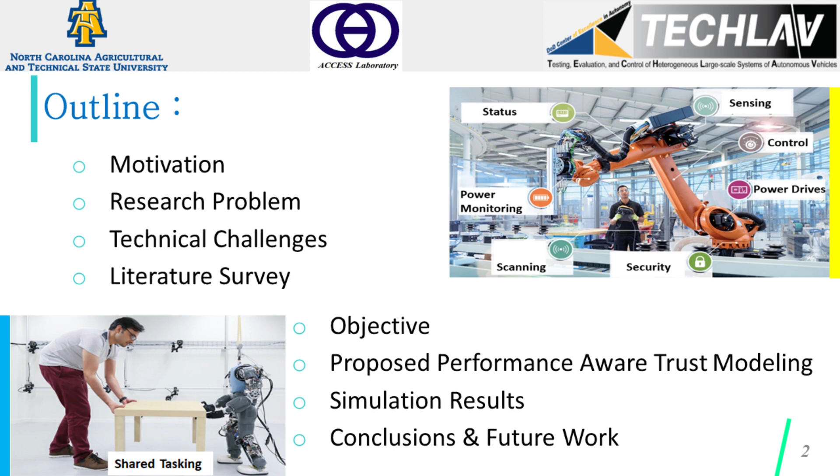This research is motivated by various human-robot collaboration applications that include warehouse management and packaging, cooperative tasking, improved safety, security, and accuracy in operations, and shared control strategy for collaboration with the robot to perform surgical tasks, and so on.

A trustful autonomy is vital for allowing human operators to smoothly control the system, comprehend the system states, and efficiently supervise the robot's activities to guide the robot to adapt to the working environment so that the human operator's trust in robots' capabilities for decision-making and handling the tasks can be increased over time.

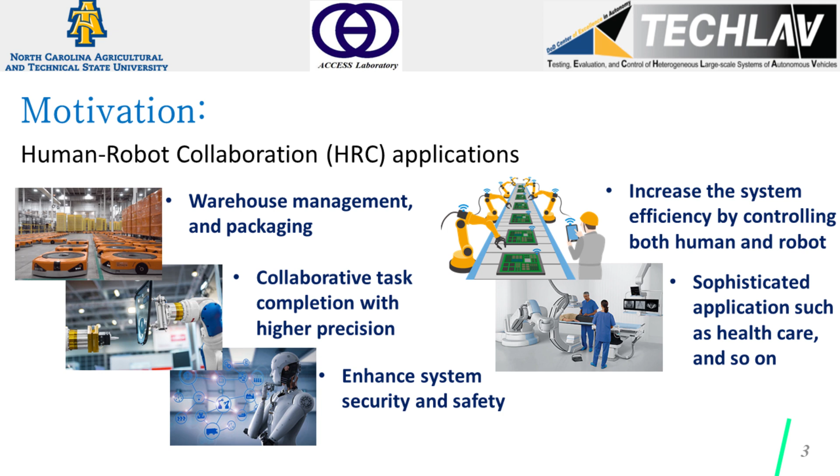Before discussing the technical challenges of this paper, let's briefly review the factors that are involved in the human-robot collaboration settings. In this setting, human operators' trust in the robot's operation can be impacted by several involved factors, that include human operators' performance and the robot performance.

So, the research problem is to develop a time-driven performance-aware mathematical model for trust in the robot within a human-robot collaboration setting and to describe the relationship between the trust and the contributing factors including human cognitive performance, human physical performance, and robot performance. Further, we are interested in understanding the relationship among trust, human cognitive and physical performances, and the robot's performance.

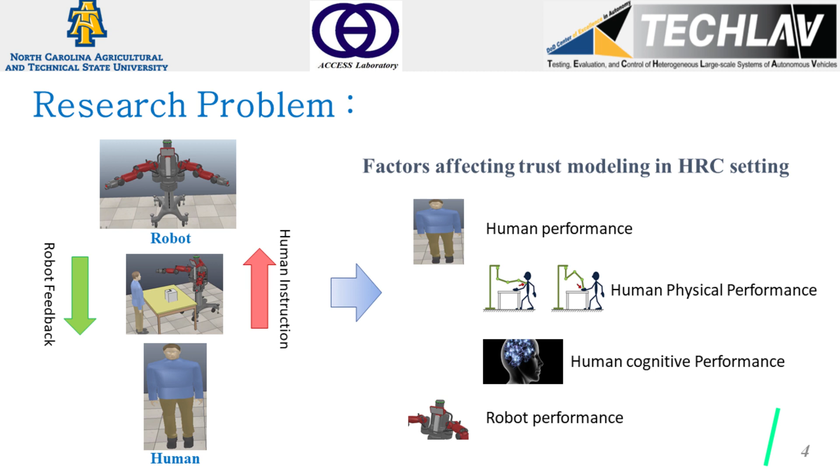One of the major challenges for mathematically modeling the trust in robot operation is its quantification in terms of the changes in the human cognitive workload and/or the human physical workload, the complexity of the shared tasks and the performance of the robot, over time.

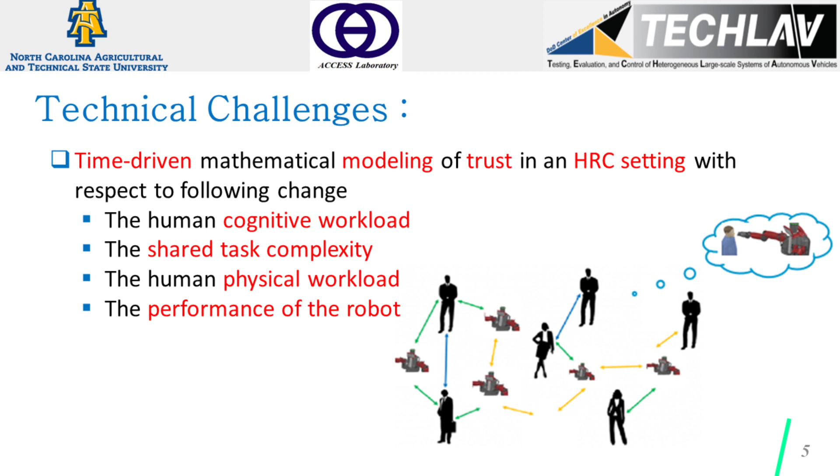In the literature, several techniques have been followed to model human operators' trust in the robot within a human-robot collaboration setting in terms of both human physical and cognitive performances, and the robot performance. In references 1 to 3, mathematical representation of a static trust model in multi-autonomy range has been proposed without any considerations of the collaborative performance.

The researchers in reference 4 have proposed trust modeling that involved only the considerations of the physical activities between the human and the robot, but no cognitive activities have been considered. In reference 5, a series of experiments with human in the loop have been performed to estimate the evolution of a computational trust model.

In contrast to the static trust models, our proposed model can capture the trust in a dynamic way. In addition, the proposed model considers the changes in both the human operator's physical and cognitive performances for modeling trust in relation to the associated task complexity. This makes our approach more realistic than the models that consider only the physical performance of the human operator.

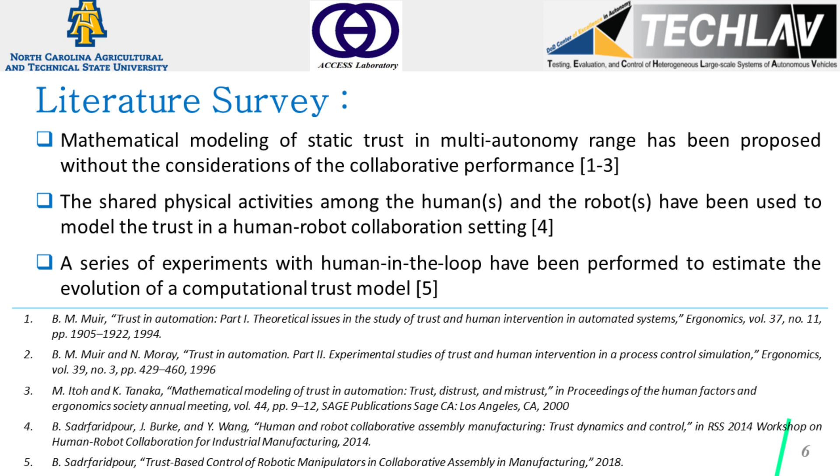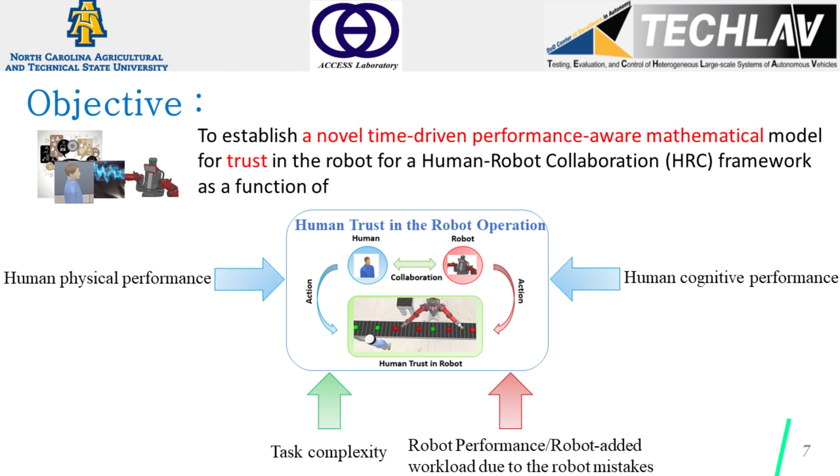Recognizing the limitations of the existing research, we propose a novel time-driven performance-aware mathematical model for trust in the robot for a human-robot collaboration framework. The proposed model considers human cognitive and physical performances. Further, the developed model takes into account the effect of the task complexity of the assigned task on human operators' trust in the robot operation.

Here, we describe the human-robot collaboration setting that is used throughout our discussion and is symbolically shown on the right side of the slide, in which a human and a robot are collaborating to perform a shared task. The robot can be utilized to perform repeated routine work, while human intelligence can handle more complex tasks such as decision-making. The robot performs the task based on instructions received from the human in the form of cognitive signals.

The human operator has been deliberately positioned after the robot, and if the robot fails even after receiving sufficient human operator's instructions, the human operator then physically removes the target object from the source conveyor. The interaction between human and robot increases the human utilization factor and the physical and cognitive workloads.

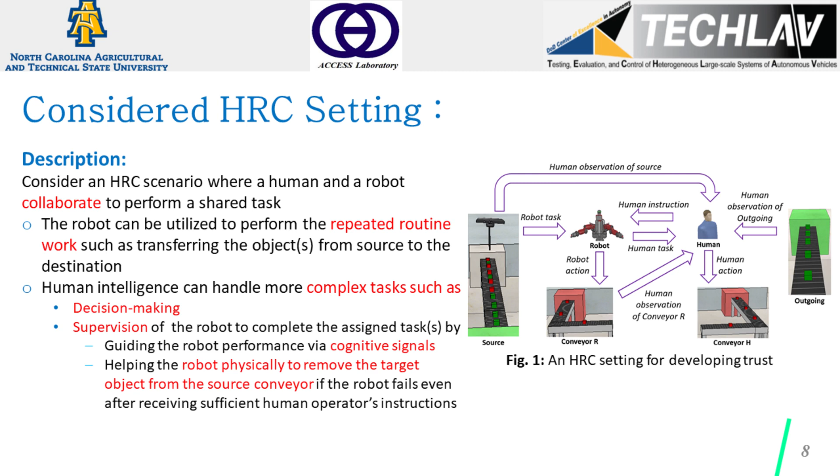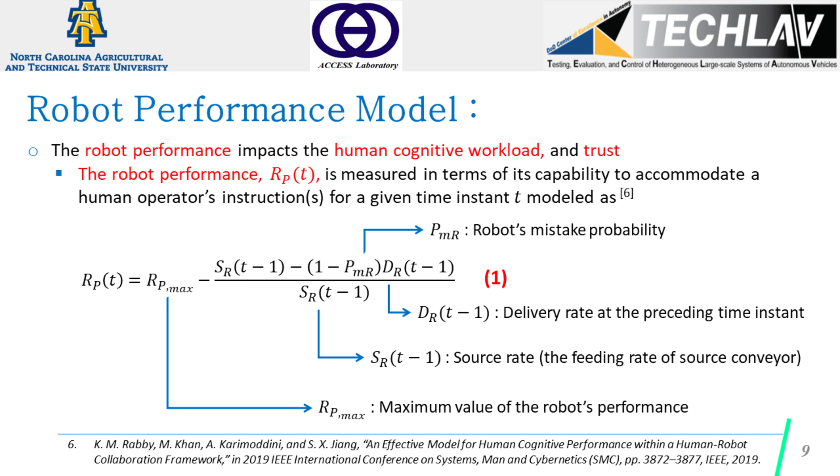As mentioned earlier, the robot performance has a significant impact on the human workload, and hence trust of the human operator. The robot performance RP for a given time instant t depends on its success in the completion of tasks, which can be modeled as given in equation 1, where RP max is the maximum value of the robot performance, PMR is the robot's mistake probability, SR is the source rate or the feeding rate of source conveyor, and DR is the delivery rate or percentage of items being handled by the robot and put on the correct conveyor at the preceding time instant.

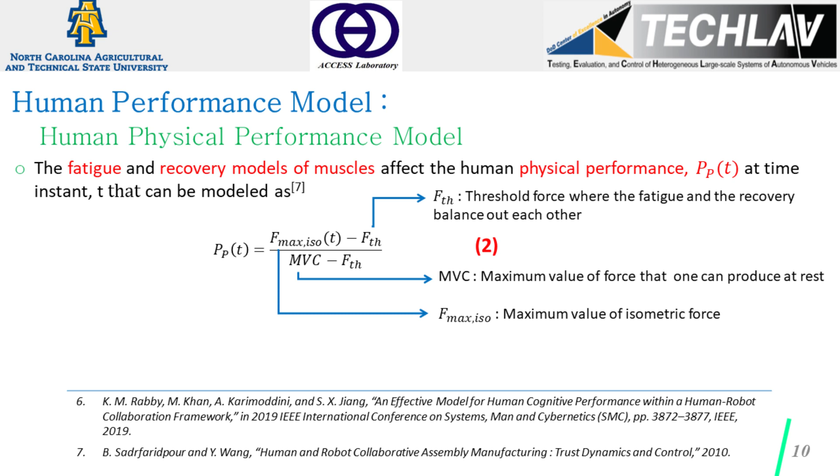Fmax ISO stands for the maximum value of isometric force and MVC for the maximum value of isometric force that one can produce at rest or the initial state or zero level of fatigue. The details about this equation can be found in one of our previously published works described in reference 6.

Incorporating all these factors, human cognitive performance CP can be modeled as equation 3, where CP max is the maximum cognitive performance, CW is the human cognitive workload, HW is the human physical workload, HR is the additional workload that is added due to mistakes of the robot, and alpha, beta and gamma are positive real numbers with alpha plus beta plus gamma equals 1.

We would like to highlight the fact that according to this equation, the human's cognitive performance is at a maximum when it is subjected to a minimum workload with no fatigue, and robot performance is maximum.

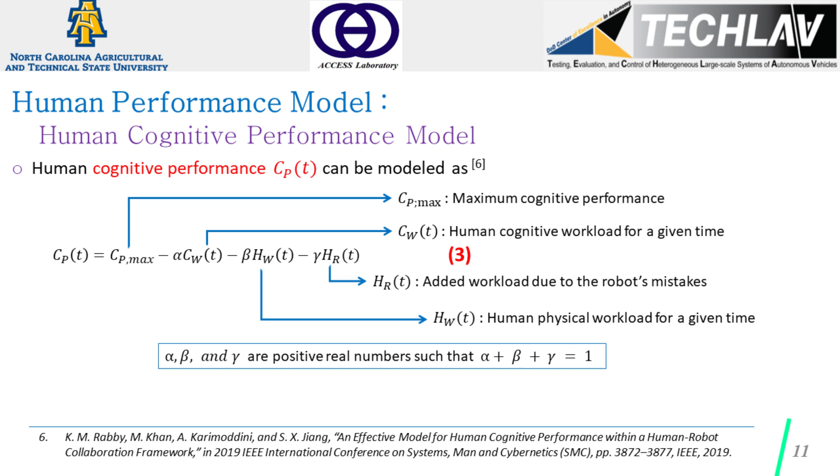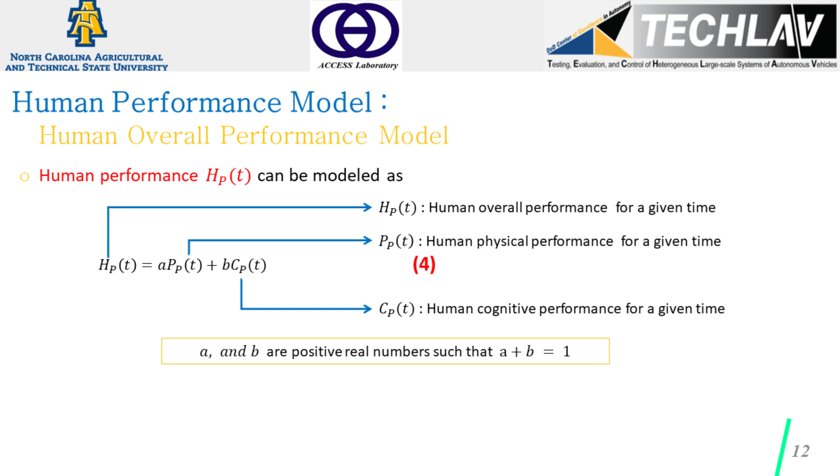Considering the human operator's physical and cognitive performances, the overall performance is calculated using equation 4, where A and B are the positive real numbers that represent the human operator's physical and cognitive performance coefficients respectively, such that A plus B equals 1. These two parameters vary in the range between 0 and 1 depending upon the nature of the work being performed by the human operator.

Trust depends upon the human operator's perception of the workspace, tasks, and the collaboration. Trust build-up process requires the human operator's confidence in the robot performance to meet the expectations to be at least equal to his or her performance. In literature, trust is commonly captured based upon three aspects such as predictability, dependability, and faith.

These parameters can be defined as distinct regions for trust build-up process represented over a normalized range as unpredictability, in which the robot performance is much lower than that of the human operator, and hence, the human operator has no trust in the robot. Predictability is where the initial trust of the human operator towards the robot is at a fixed level. Dependability is where the human operator's trust in the robot increases with the increase of the robot performance, and faith is where the human operator's trust in the robot is at the maximum.

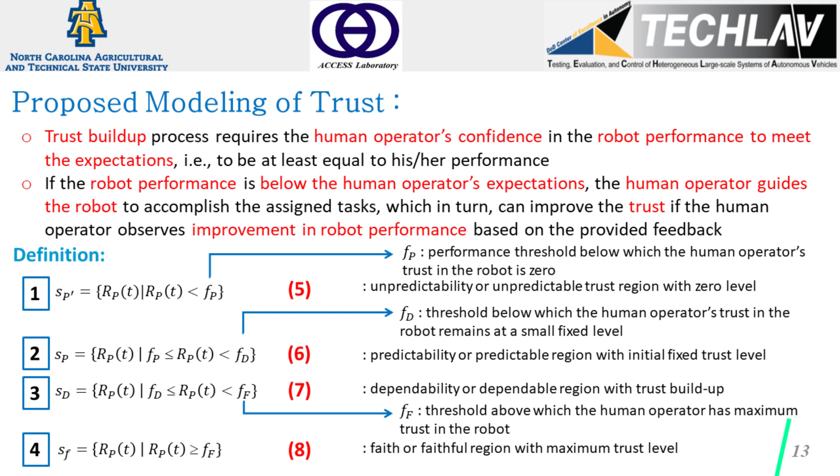With these definitions of unpredictability, predictability, dependability, and faith that is discussed in the previous slide, trust is defined in equation 9. Figure 2 shows the trust as a function of Rp at time t that is less than threshold Fp. Here, threshold Fp is the function of human performance at time t, and sigma is a small number used for representing robot performance in the unpredictable region. As such, the trust in the robot is modeled as 0.

When the robot's performance is more than or equal to threshold Fp but less than threshold Fd, that is the function of human performance at time t, and ρ that is a small number, in the predictable region, the trust in the robot remains at the epsilon level, which is a small constant value. Only after the robot performance is greater than or equal to threshold Fd, the robot's performance enters the dependable region, and the trust build-up process starts.

In this situation, we consider the trust as a function of the relative performance of the robot and the human operator. Once the robot performance Rp is greater than or equal to threshold Ff, then the robot reaches the faithful region, and the trust will be at the maximum. Here, ΔP equals Rp at time t minus threshold Fd. Moreover, C and epsilon are variables that depend upon the human operator's nature.

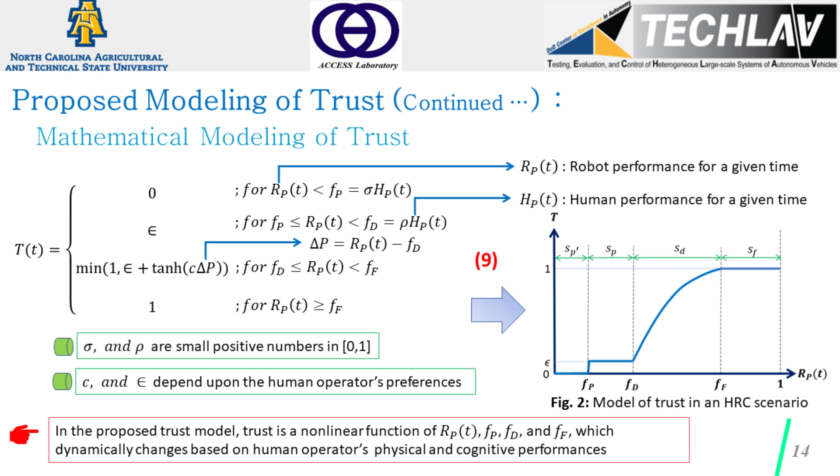To validate the proposed model of human operator trust in the robot operation, we consider a manufacturing workspace scenario in which a human operator and a robot can collaboratively work to transfer the produced items as shown in this slide. The source conveyor carries the incoming boxes to the workspace, and a robot separates a particular set of objects, of red color, from the different objects, of non-red colors, that are passed to the robot. The robot places the target set of objects, with red color, into a designated area called conveyor R while allowing all other objects to keep moving on the conveyor belt.

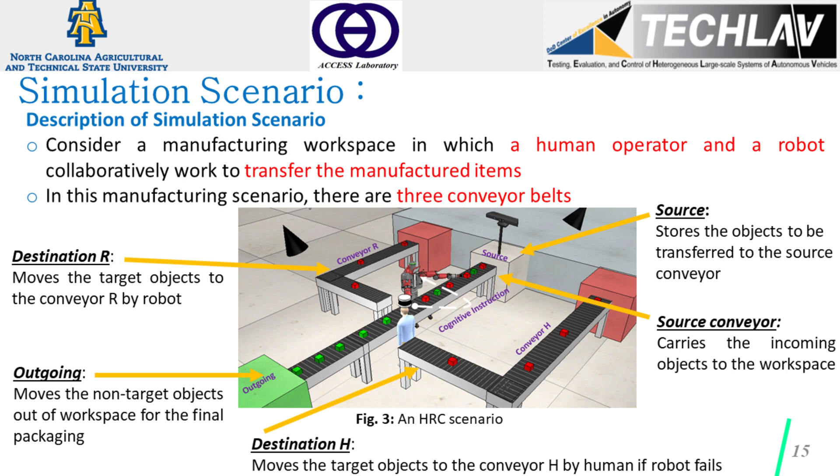The human operator is positioned after the robot, and if the robot fails even after receiving sufficient human operator's instructions, the human operator physically removes the target object from the source conveyor to the conveyor H. The non-red objects are allowed to remain on the source conveyor and are passed to go out of the workspace for packaging. The robot's task is to physically move the objects from source conveyor to destination conveyor based on the human's instructions. The human operator supervises and instructs the robot to complete its task correctly.

Also, if the robot fails even after receiving sufficient human operator's instructions, the human operator physically removes the target object from the source conveyor. Collaboratively, both the human operator and the robot work together to separate target objects from the source conveyor and allow non-target objects to the outgoing for packaging.

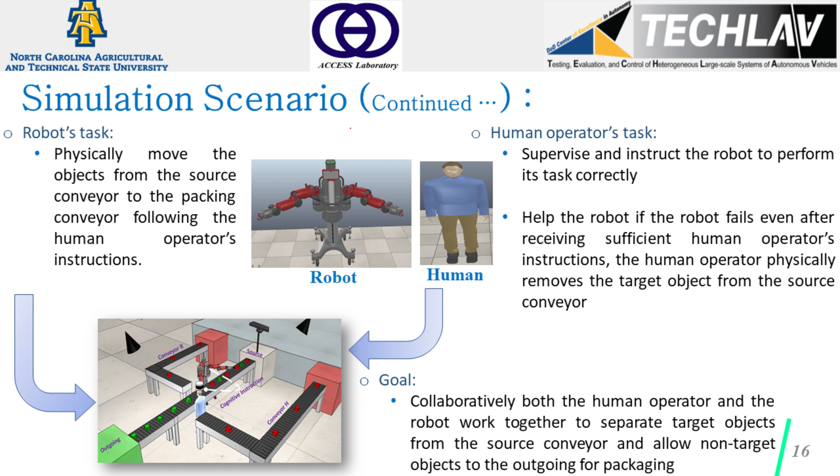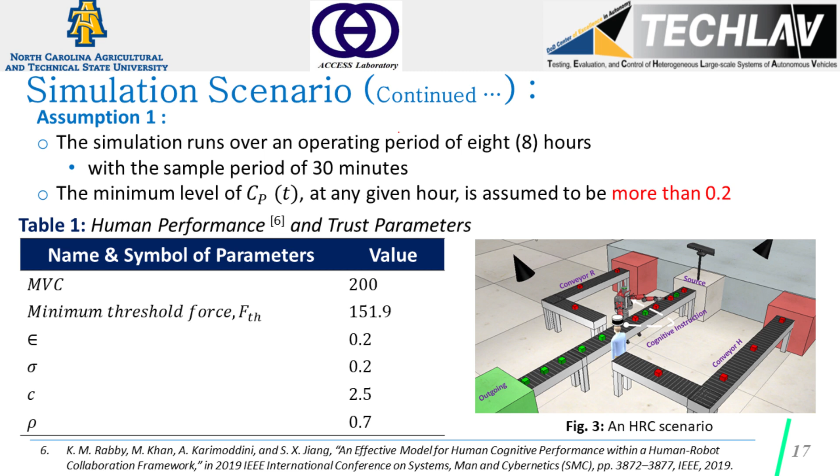To simulate the scenario, we use the derived set of equations, which have been discussed in the previous slides. Using these equations, the human operator performance and trust parameters are summarized in Table 1. The simulation runs over an operating period of 8 hours with the sample time of 30 minutes. The minimum level of human cognitive performance at any given instant is assumed to be more than 0.2, below which the human operator is considered to be incapable of performing the cognitive workload.

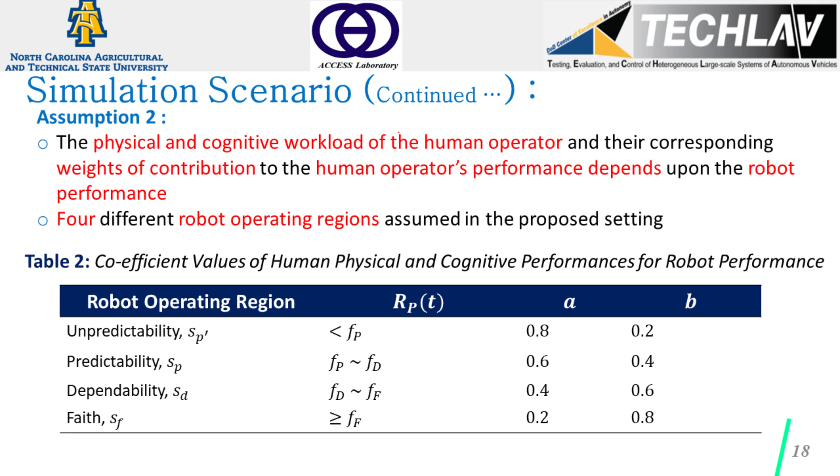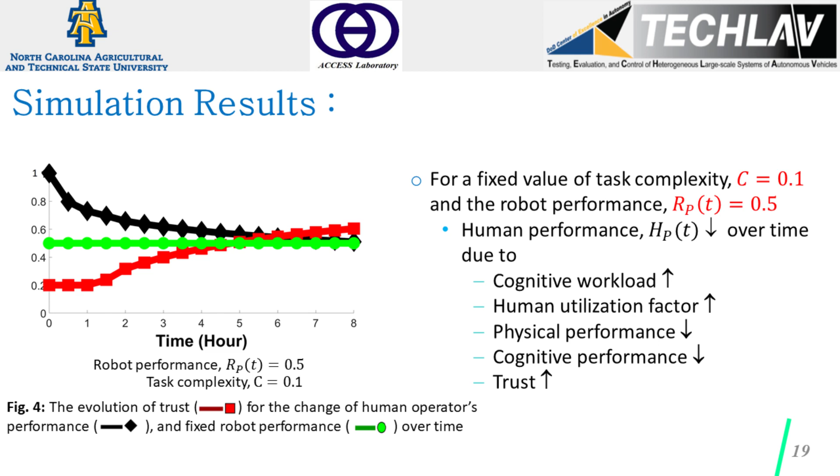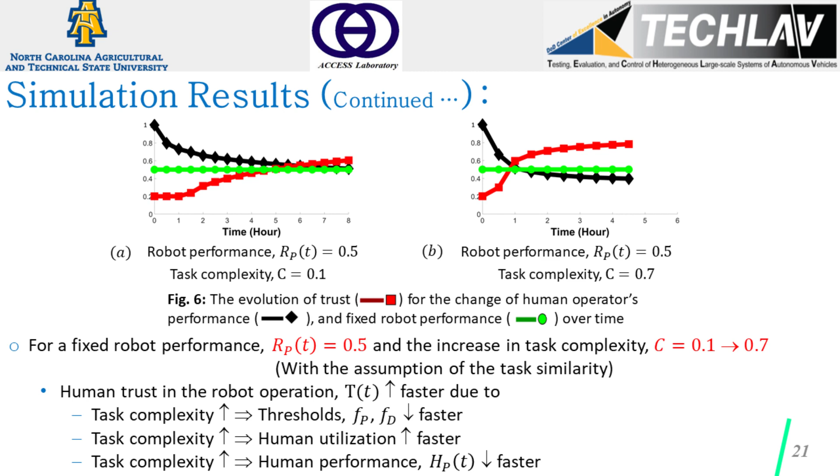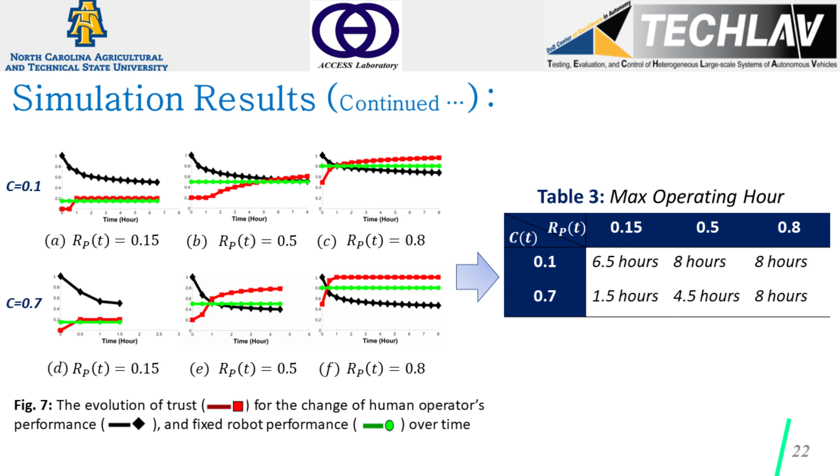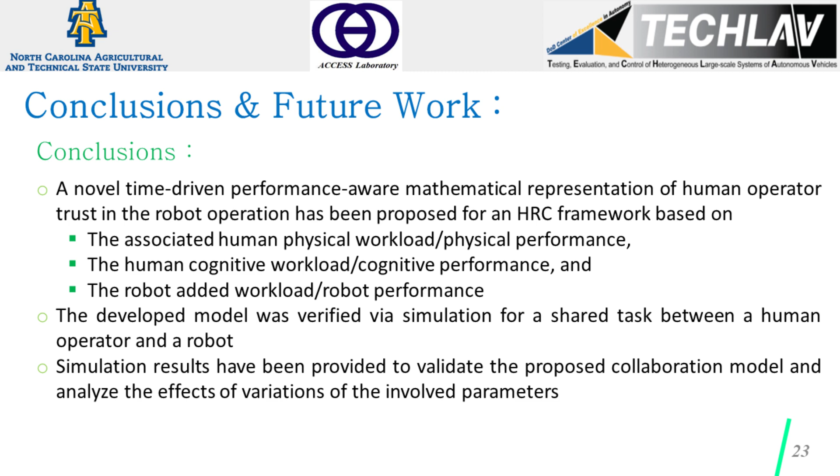The developed model and simulation results confirmed that a decrease in robot performance decreases the trust, and an increase in robot performance increases the trust with the consideration of slowly decreasing human performance. Moreover, the decrease in task complexity causes a decrease of trust with the consideration that human performance is greater than the robot performance, and the increase in task complexity causes an increase of trust with the consideration that robot performance is greater than the human performance.

In the future, we shall extend the performance-aware trust model to human multi-robot collaboration for complex task planning and resource management.